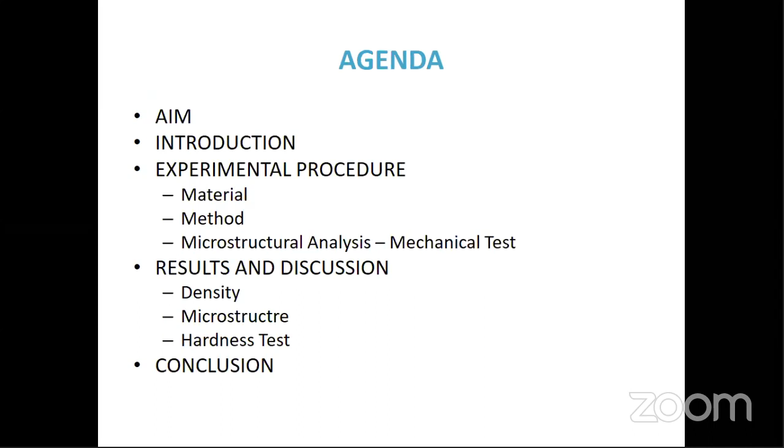This study aims at determining the effects of sintering time on density, microstructure, and hardness of boron carbide reinforced hypereutectic aluminum silicon alloy composites produced by cold pressing and microwave sintering process.

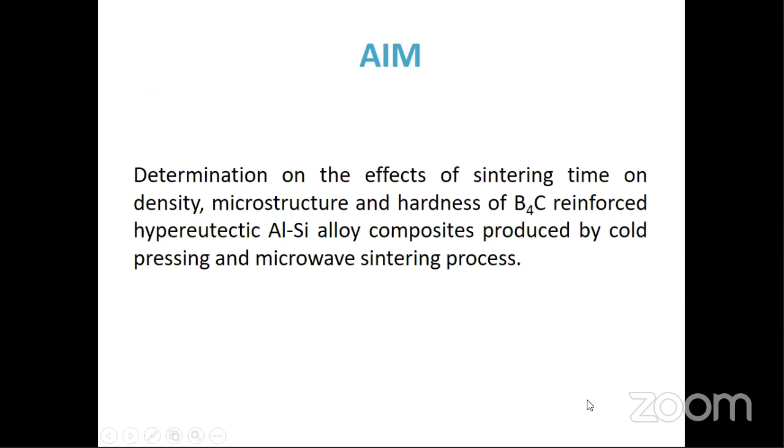Composite materials have become a requirement for modern production technology due to the fact that they have improved physical and mechanical properties. The main application areas of composite materials are the aerospace, military, and automobile industries.

Different techniques are used for the production of metal matrix composites. The most common of these is powder metallurgy, cold pressing, and sintering, one of the PM techniques. Different sintering techniques are used, one of which is microwave sintering.

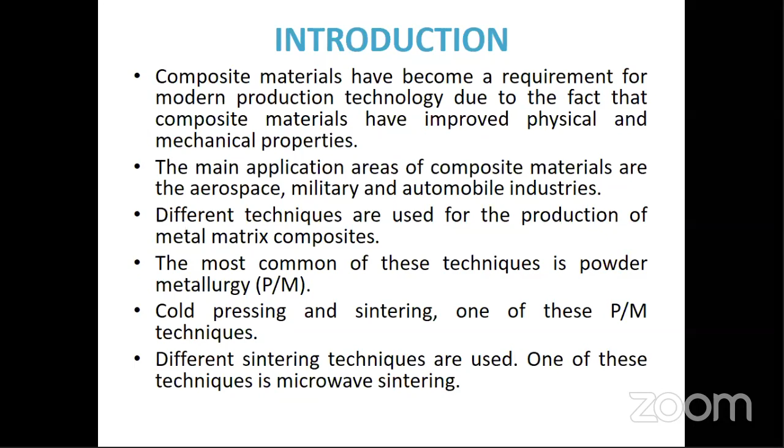Microwave heating is due to the material's ability to absorb high-frequency electromagnetic energy and convert it into heat. The microwave heating occurs from the core and generates heat inside the sample. The use of microwave energy for sintering materials has advantages in reduced processing times and energy saving.

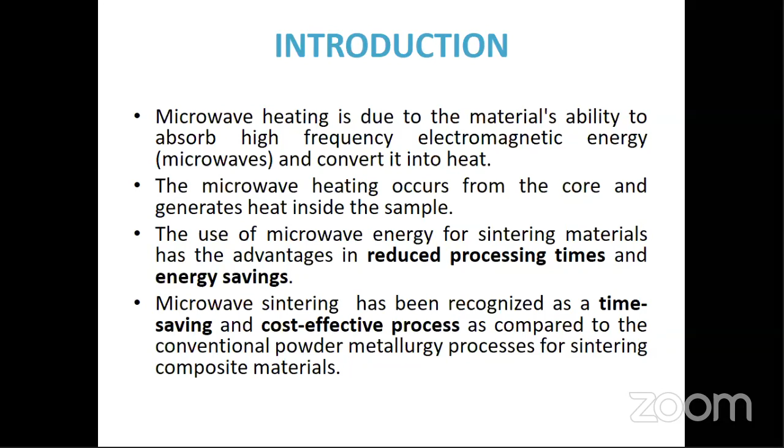Microwave sintering has been recognized as a time-saving and cost-effective process compared to conventional powder metallurgy processes for sintering composite materials. In this study, hypereutectic aluminum silicon alloy has been chosen as the matrix material, and boron carbide was used as reinforcement.

Aluminum boron carbide composites were produced by cold pressing and microwave sintering techniques. The effects of sintering time on density, microstructure, and hardness were investigated.

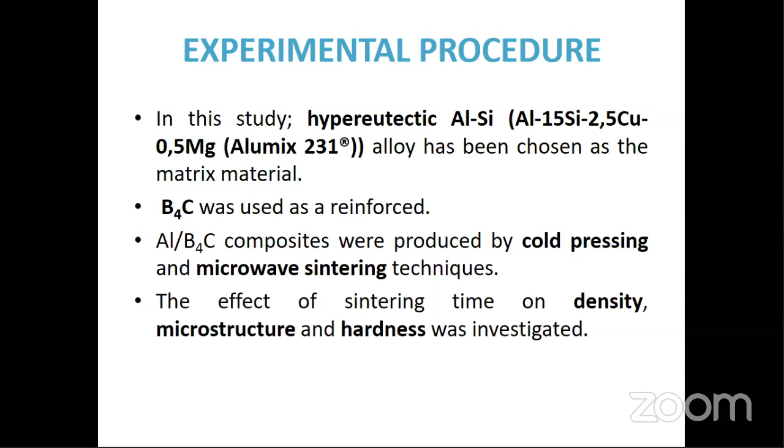Table 1 represents the nominal chemical composition of the matrix material. The Alumix 231 powders with an average size of about 75 micrometers were produced by inert gas atomization. The reinforcement particle boron carbide has a density of 2.52 grams per centimeter cubed, and average powder particle size is 10 micrometers.

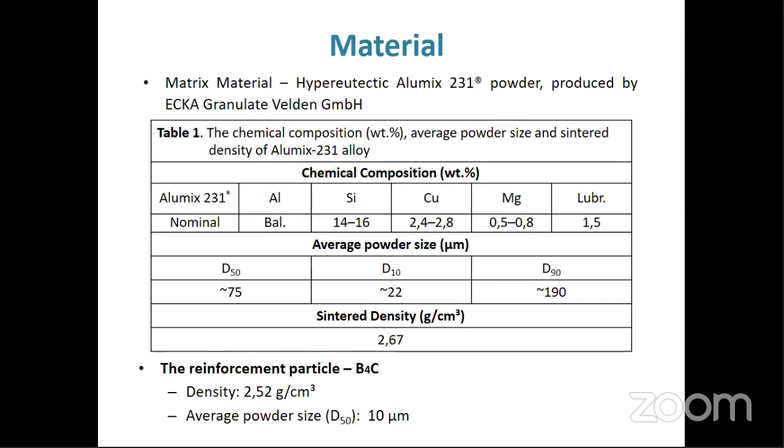Sintering was carried out at 555 degrees for 15, 30, 45, 60 minutes and without holding time. Heating rate to the lubricant elimination temperature was set at 5 degrees per minute, and sintering temperature rate was set at 10 degrees per minute.

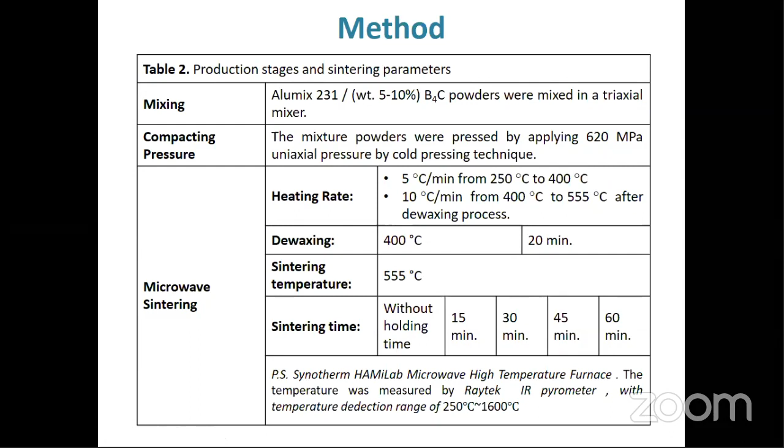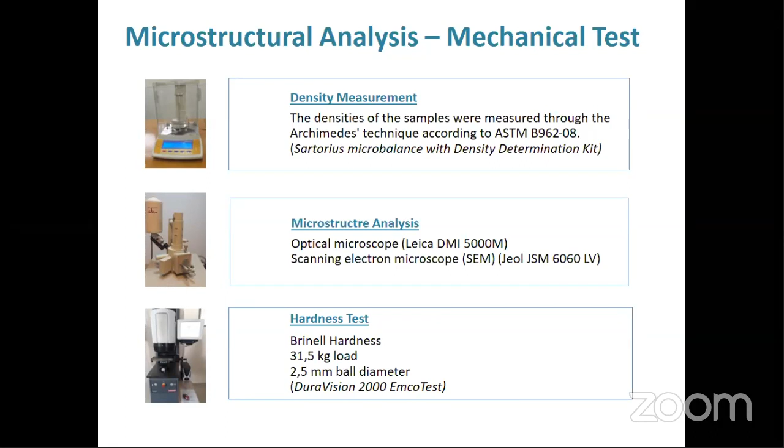Green density and sintered density of the samples were measured through the Archimedes technique. Optical microscope and scanning electron microscope were used in microstructural analysis. Hardness measurements were performed using Brinell hardness test with 31.5 and 2.5 mm ball diameter.

The experimental results were discussed in this section. The MW sample code shown in table 3 represents microwave sintering. The numbers 0, 5, 10 next to the MW code indicate the percentage by weight boron carbide particle ratio.

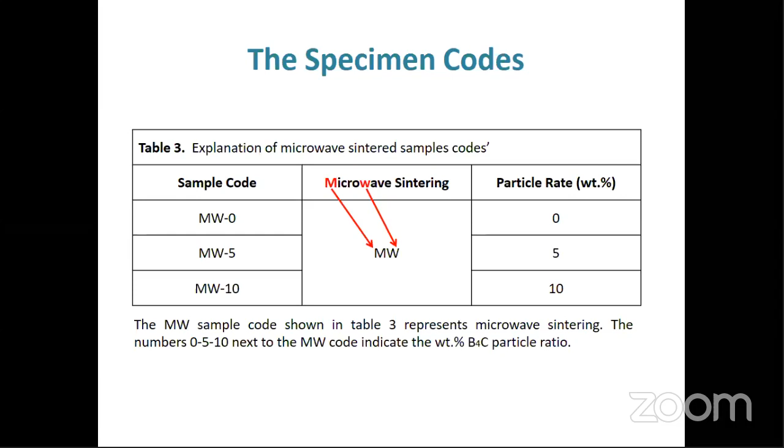Compared to the green density values, all samples had decreased density with the sintering process. The highest density values in sintered samples were obtained at 60 minutes sintering time. However, there is no significant difference between densities of the samples obtained by sintering without holding time and sintering for 60 minutes.

Figure 1 represents the SEM micrograph of sample MW0 sintered at 555 degrees without holding time, and the EDS results shown in table 5 were marked in the figure as points 1 to 4.

Point 1, light gray particles, contains 94% by weight silicon in EDS results. These are primary silicon particles.

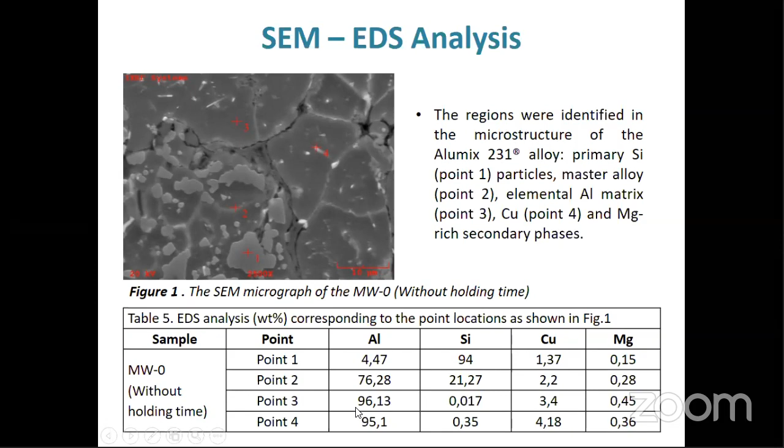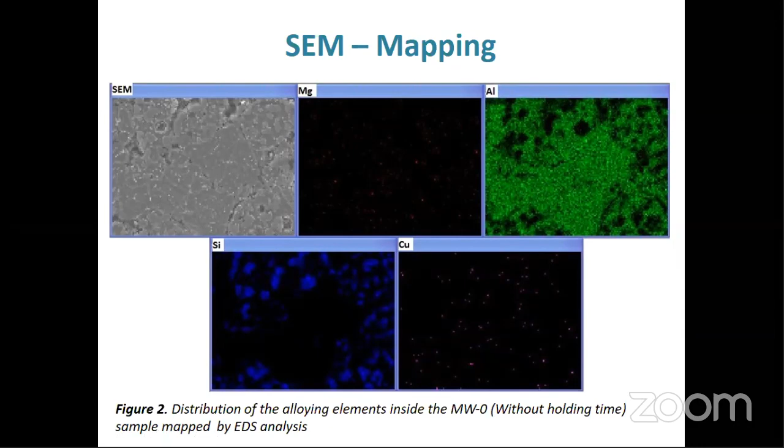Figure 2 represents the microstructure map of the MW0 sample sintered at 555 degrees without holding time. The map shows that the primary silicon particles, blue ones, emerge in the original master alloy grains.

Copper and magnesium-rich second phases had a homogeneous distribution in the master alloy and elemental aluminum regions. The SEM micrograph of the MW5 without holding time sample is shown in figure 3.

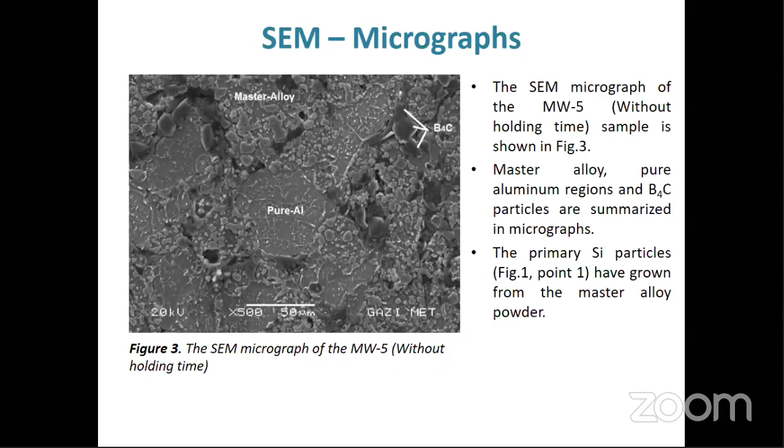Master alloy, pure aluminum region, and boron carbide particles are summarized in the micrographs. The primary silicon particles have grown from the master alloy powder.

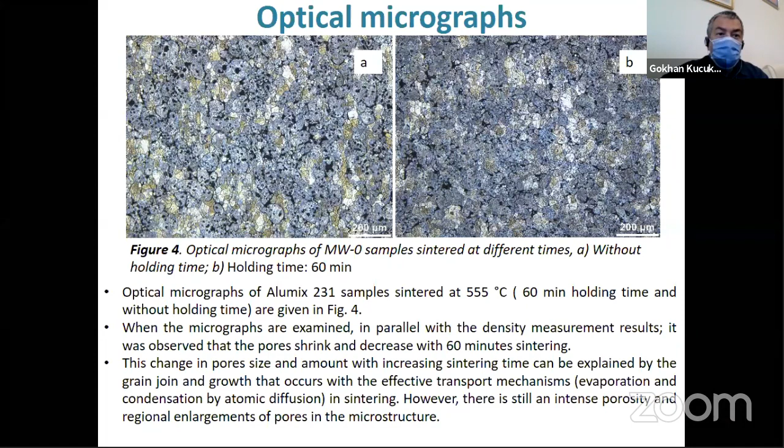Micrograph of Alumix 231 samples sintered at 555 degrees are given in figure 4. When the micrographs are examined in parallel with the density measurement results, it was observed that the pores shrink and decrease with 60 minutes sintering. This change in pore size and amount with increasing sintering time can be explained by the grain joining and growth that occurs with the effective transport mechanism in sintering.

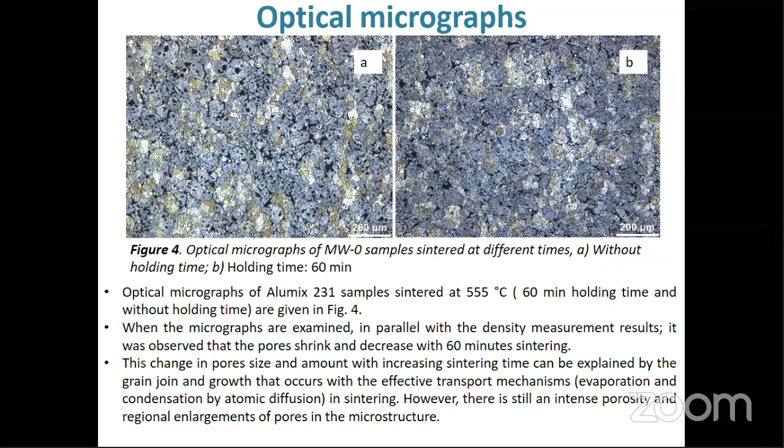However, there is still intense porosity and regional enlargement of pores in the microstructure. In addition, the bonding problems between the grains are seen in figure 5. There wasn't a good diffusion event and sufficient cohesion between the grains couldn't be achieved. Therefore, a long sintering time of 60 minutes didn't show the expected improvements in microstructure and density compared to the without holding sample.

The wettability of boron carbide particles and its bonding ability with matrix material are difficult. So, with the effect of the sintering process, boron carbide particles push towards the grain boundary.

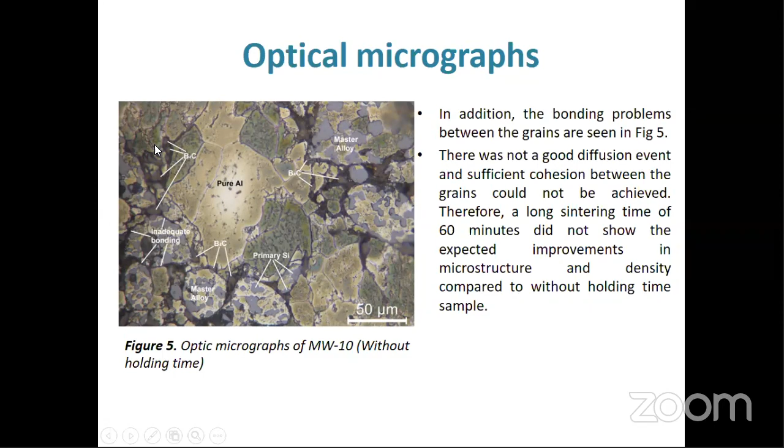The highest hardness value was determined in the sample coded MW0, which was without holding time. There was no significant increase in hardness in the sample MW0 and MW10 at 60 minutes sintering time. Although there is no significant change in density, the decrease in hardness caused by the increasing boron carbide addition can be explained by the pushing of boron carbide particles into the pores and the grain coarsening during sintering. The decrease in hardness was observed with increasing sintering time in samples, grain coarsening with increasing sintering.

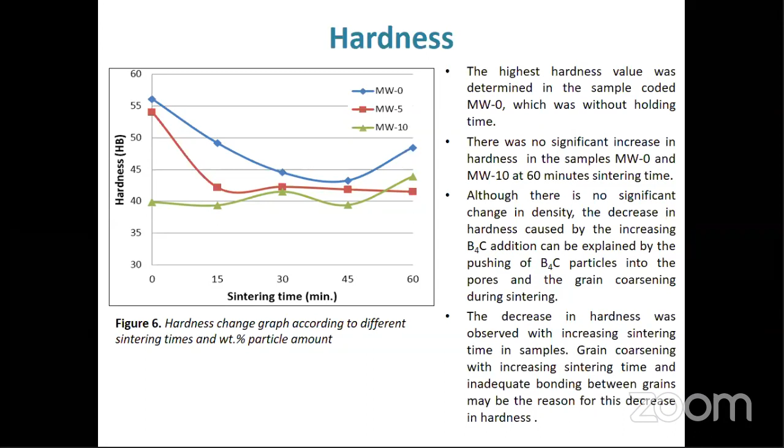Can I continue? Please go on, please go on.

Thanks. The decrease in hardness was observed with increasing sintering time in samples; grain coarsening with increasing sintering time and inadequate bonding between grains may be the reason for this decrease in hardness.

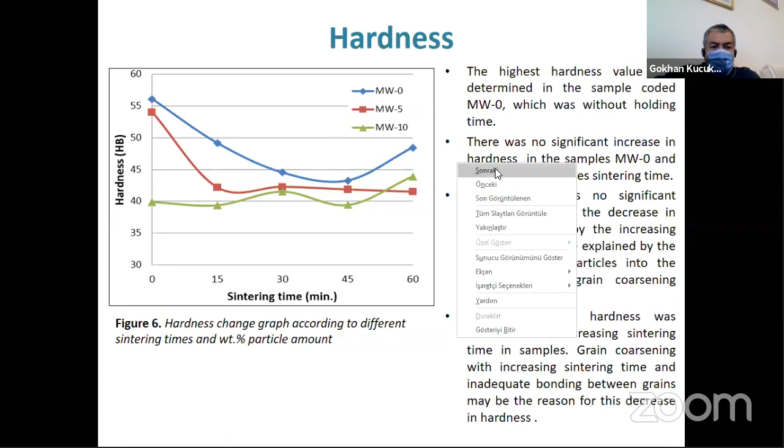Conclusions were achieved in this study. Boron carbide particle reinforced Ecka Alumix 231 aluminum composites were produced through the cold press microwave sintering technique. Sintering process was carried out without holding time and at 4 different times. The green density of the samples decreased with increasing percentage by weight of boron carbide. Compared to the green density values, all samples had decreasing density with the sintering process. The highest density values in sintered samples were obtained at 60 minutes sintering time. However, these changes observed in sample densities were limited to small values.

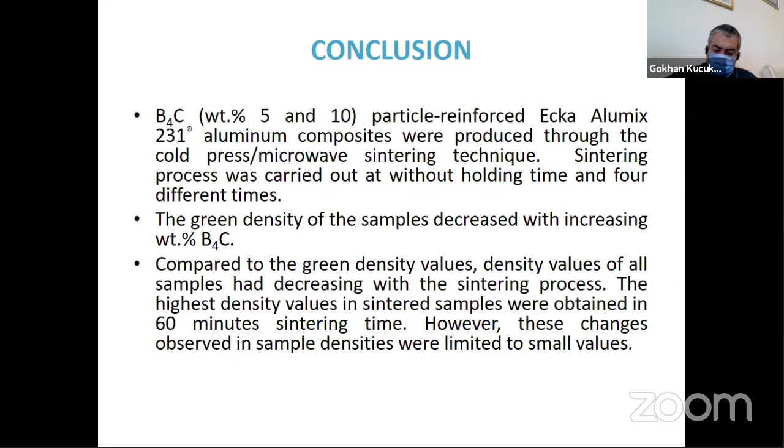Different regions were identified in the microstructure of the Alumix 231 alloy: elemental aluminum matrix, master alloy, primary silicon particles, and copper and magnesium-rich secondary phases. The primary silicon particles emerged in the original master alloy grains. The copper and magnesium-rich second phases had a homogeneous distribution in the master alloy and elemental aluminum regions.

The highest hardness value was determined on the sample that didn't contain boron carbide and without holding time at the sintering temperature. Sample hardness was observed to decrease with increasing boron carbide particle ratio. It was determined that boron carbide particles clustered in the pores. The samples produced without holding time at 555 degrees gave optimum values in terms of density and hardness.

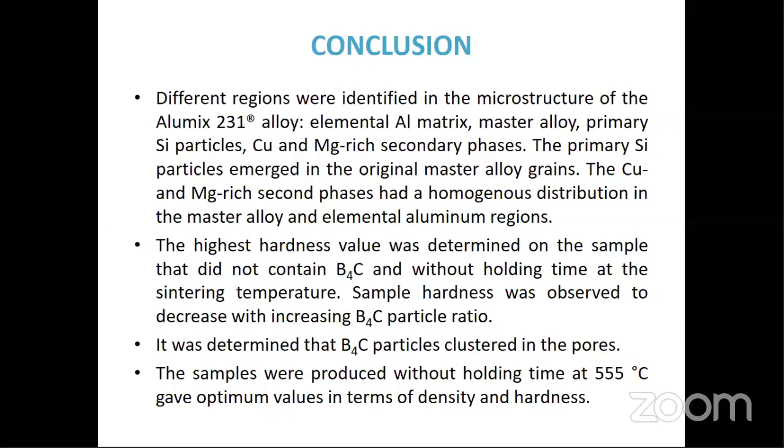Thank you so much, dear Seher İrem. Is there any question to ask Seher? Dear audience, do you have a question for these presentations? Okay, thank you so much, very fruitful presentation. You're welcome. Thank you. Okay, see you there. Okay, then shall we start the next presentations?

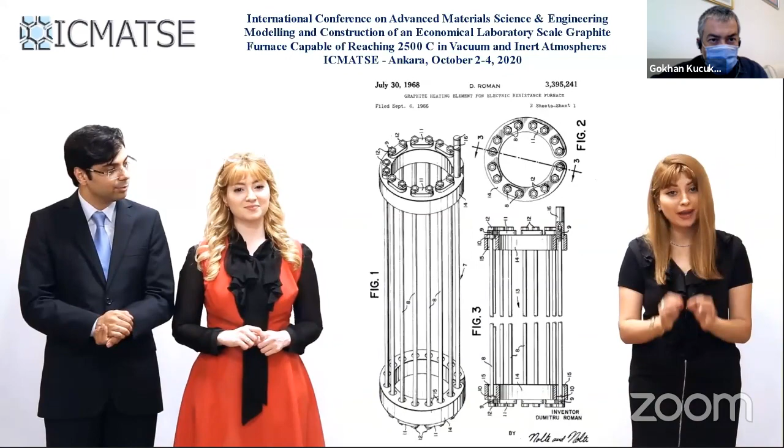There are very interesting graphite hot zone designs either published in academic literature or patented, some of which are widely used industrially. However, upon reviewing them in detail, we found that there are only a limited number of hot zone designs available that meet the requirements of a compact lab-scale graphite furnace for research and development purposes.

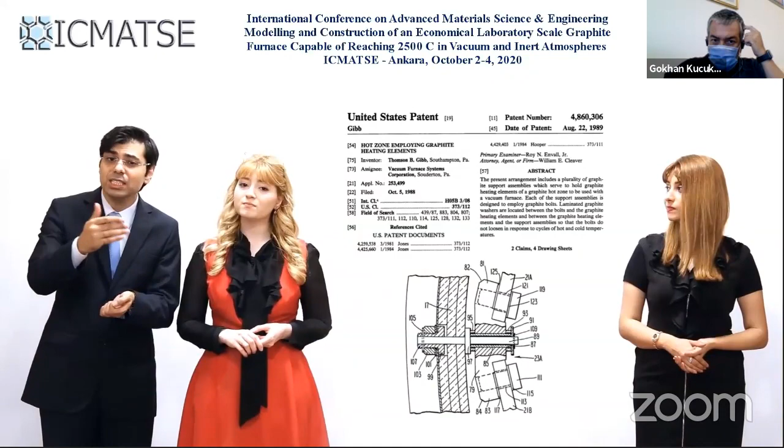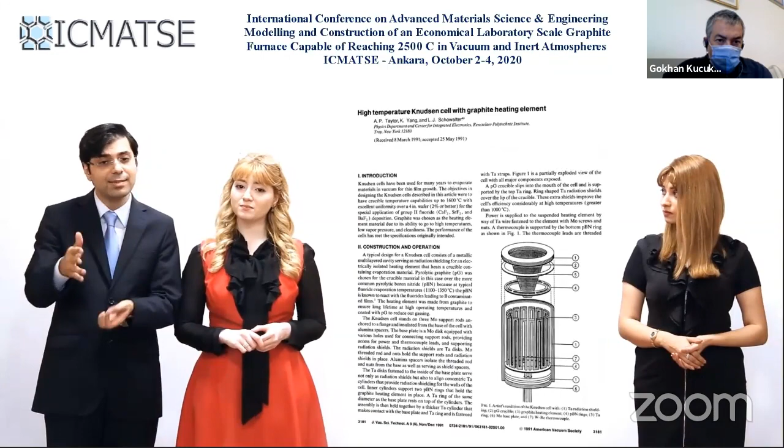It is noteworthy that the majority of available designs require utilization of step-down transformers with ampere ratings of over 1,000 amps, thus increasing the primary cost of the furnace as well as the cost associated with replacing and repairing the hot zone due to the geometrical setup of the graphite heating elements used in the available designs.

An additional problem with graphite furnaces is the difficulty in quenching operations, which tends to be solved through rather operationally inconvenient procedures, such as high inert gas purging as in the case of silica fiber drawing furnaces, making it rather challenging to quench a sample in vacuum.

So with these points in mind, we proceeded with the following design criteria for the furnace: the ability to reach 2,500 degrees Celsius in just minutes, capacity to sustain the mentioned temperature for several hundred hours if necessary, the ability to cool down the furnace at very high rates without using any fluids for quenching purposes, and most importantly, maintaining the cost of the main hot zone as low as possible.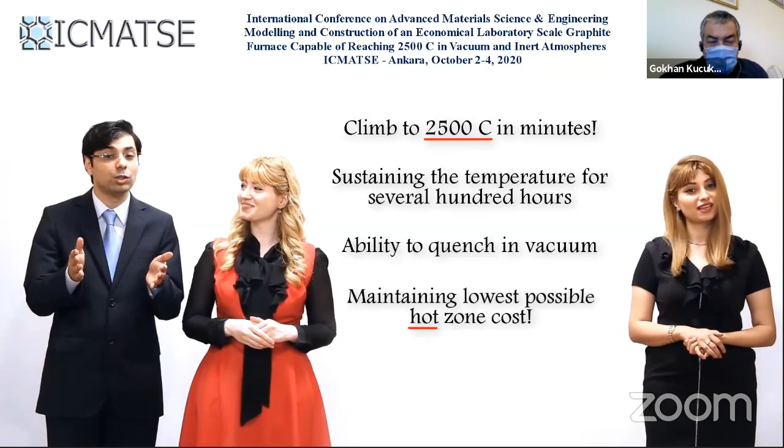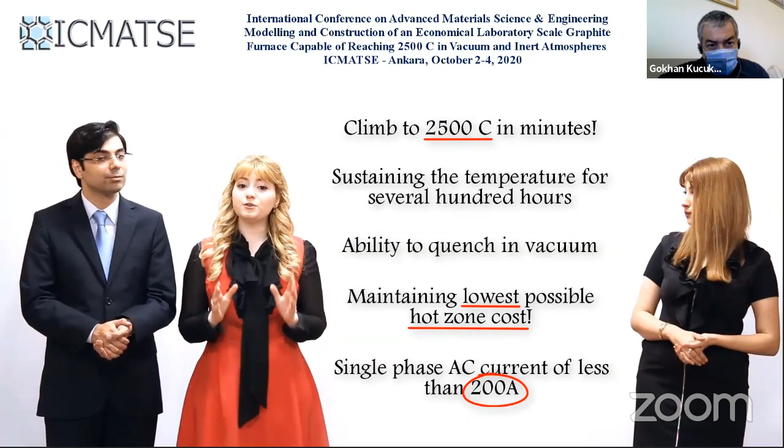We decided that the total current utilized should be less than 200 amperes, and it must be operational on single-phase alternating current, with the intention of minimizing the cost of the step-down transformer and other electrical components necessary for the system. So we tried a series of different designs which were simulated by finite element analysis.

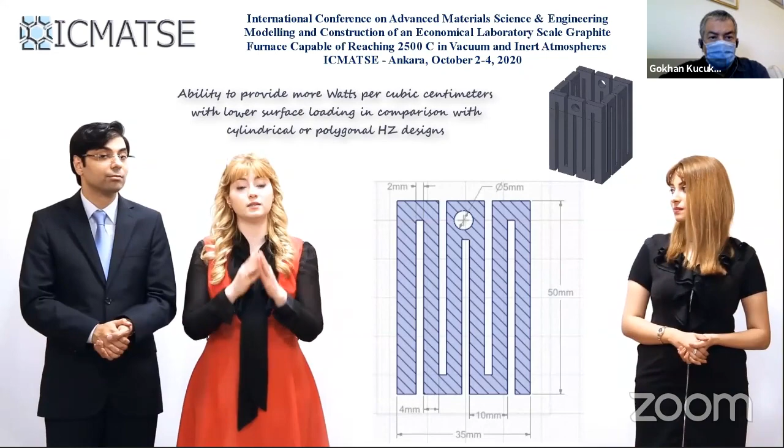It was concluded that the optimized geometrical design shown here is particularly interesting for a number of reasons, such as the ability to provide a higher total power dissipation by the heating element in comparison to a cylindrical or polygonal hot zone of the same volume, considering a constant surface loading value in both cases, which facilitates approaching higher temperatures and also extending the longevity of the heating element.

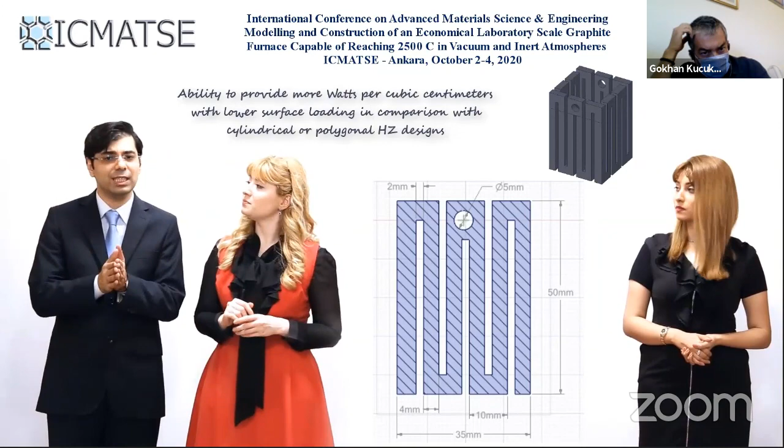Moreover, every cubic centimeter of high-purity graphite which has been sintered at elevated temperatures using hot isostatic press technology is very precious. So it is only logical to minimize the consumed graphite during machining of the geometry required.

Therefore, in the proposed design, it is possible to simply machine slabs of graphite and to connect them using nuts and bolts made from the same grade of graphite, minimizing the wastage during the manufacturing process. It is also noteworthy that a similar volume of hot zone constructed in the conventional cylindrical or polygonal design consumes a significantly greater amount of raw material.

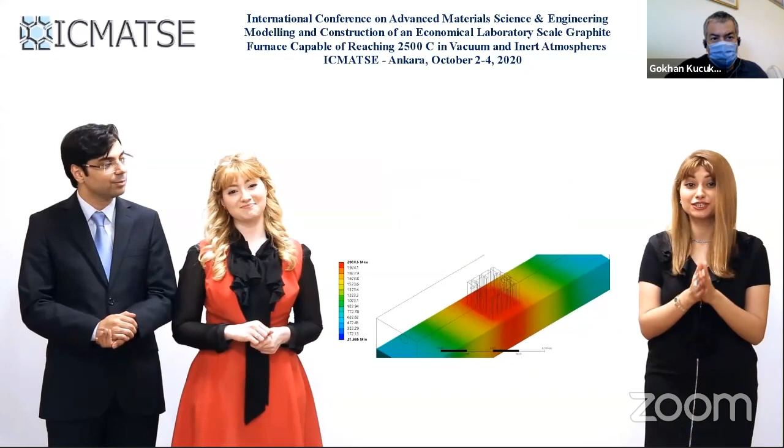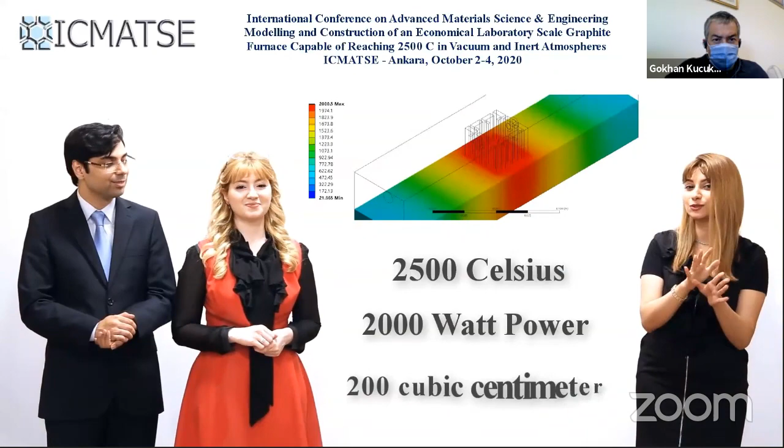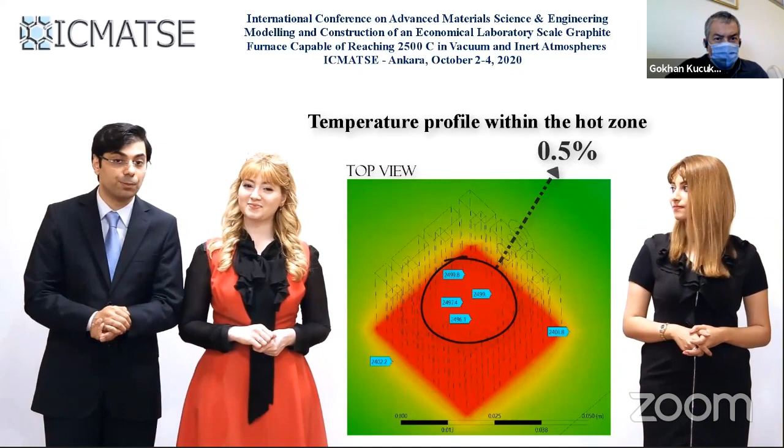Our thermoelectrical simulations on various graphite grades have shown that it is possible to achieve a temperature of 2,500 degrees Celsius with an approximate power of just 2,000 watts for a usable hot zone volume of approximately 200 cubic centimeters. Furthermore, the temperature variations within the central 60 cubic centimeters of the hot zone do not exceed 0.5% of the maximum furnace temperature. The mentioned values have been repeatedly confirmed experimentally.

The entire system works on single-phase alternating current, with the hot zone placed inside an ordinary vacuum chamber with two water-cooled electrical feed-throughs connected to a stainless steel chamber. And the entire system is practically consuming a power equivalent to 3 toasters.

Another beauty of this design is that due to its size, the water cooling system has the capacity to cool it down very effectively if the power is disconnected. And we have seen an average cooling rate of approximately 300 Celsius per minute, from 2,500 to 1,000 Celsius.

On a different note, one should consider the thermodynamics of a system in which any sintering or heat treatment is to be conducted. It must be very clearly analyzed prior to any experimental work, as the furnace design in itself can have significant impact on the chemical equilibria which emerges, and also possesses the capacity to alter the phase equilibrium in solid state.

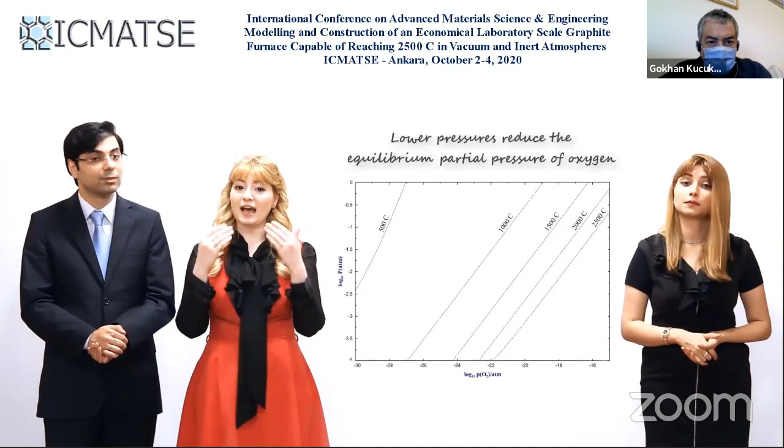It should also be noted that carbon monoxide's partial pressure cannot be ignored, regardless of the process in question. The equilibrium partial pressure of oxygen in such a system is pressure dependent. Therefore, the choice of vacuum level or positive atmosphere's total pressure should be taken into account prior to experimentation with such a system. Special attention should be given to furnace atmospheres as a result of residual gases during a sintering or heat treatment operation.

Since this factor can have a very significant influence on microstructural evolution and defect chemistry of the material being researched, to conclude: every one of us researching in the field of ultra-high temperature materials, especially on refractory metals and their carbides, nitrides, or borides, can build a graphite furnace capable of reaching temperatures up to 2,500 degrees Celsius by bringing together equipment usually available in most labs and a hot zone of just $100, with a service life of several hundred hours, paving the way for lots of high temperature experiments, with the only limit being our creativity.